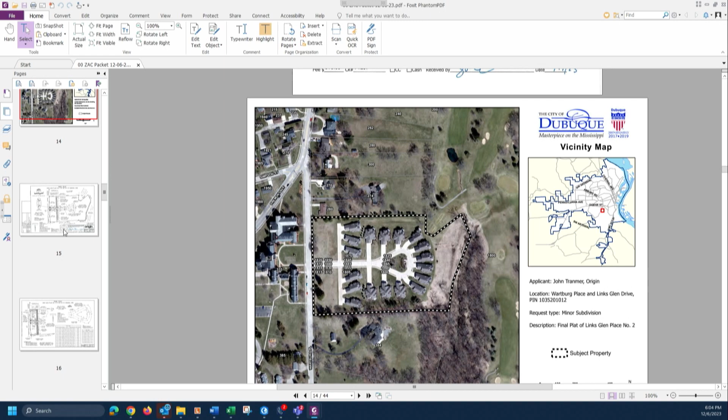Staff report by Assistant Planner Jason Duba. Thank you for the correction to the report - there will be 3 lots again after this plat is completed. Lot 1 is the largest at about 8.2 acres and contains 18 existing residential homes. Lots 2 and 3 are closest to Wartburg Place; Lot 2 is about 0.83 acres, Lot 3 is about 0.91 acres.

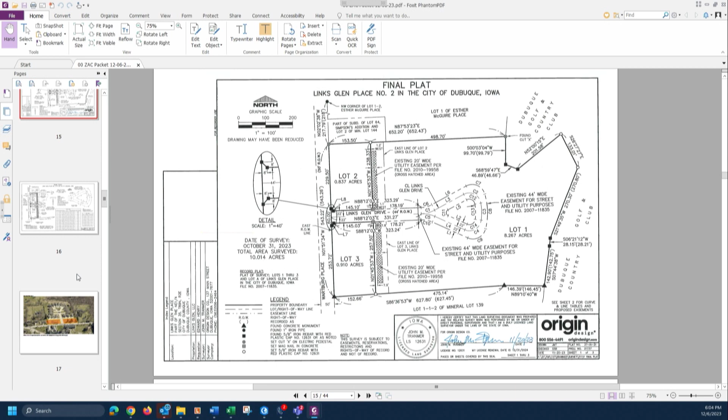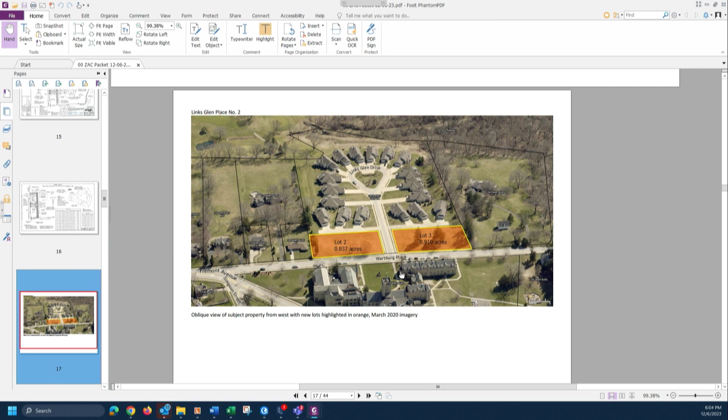These are currently undeveloped, and the plat will allow them to be developed in the future. They're zoned planned residential, and the city's comprehensive plan identifies housing of various types as beneficial to the community. All right, any discussion or questions from the commission? No?

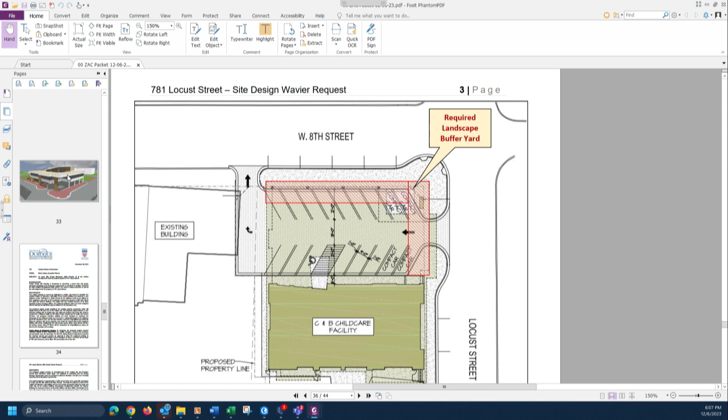This is kind of an odd situation in that, yes, it's a parking lot, but it's also a building. This is a parking lot tucked underneath the building, so the second floor will actually be over the parking lot. Buildings in these districts are allowed a 0-foot setback, I believe, so they can build right up to the property line. But since it's a parking lot under the building, that's where we ran into some issues, and we believed it was worthy of asking for a variance.

If we did have to put the buffers in, we would lose over half of our parking stalls in this lot, which is intended to be for just pick up and drop off use for the daycare only. There's going to be no staff, no parking all day long. It's just going to be a real short, 10-minute kind of pick up, drop off of the kids.

So that's the gist of the parking buffers. The second item is the landscape requirements. Currently, this site has 0 green space on it. The existing site is a parking lot. Starting at the south end, there's a parking lot, there's a building, and then there's a parking lot.

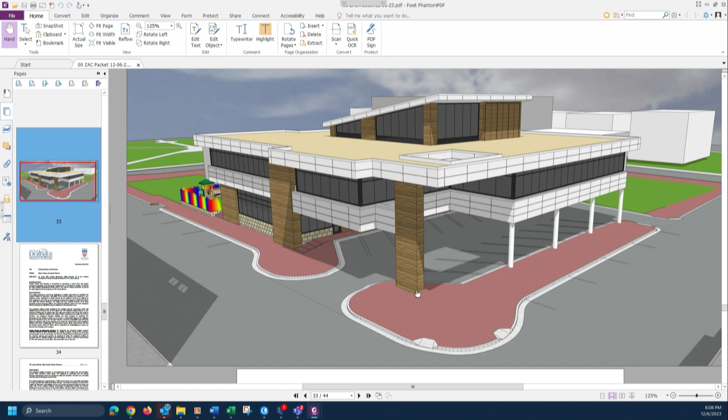As required by state requirements, just to put a daycare in, you do have to create green space, and in doing so we will, but we won't be able to meet the... wait, I'm sorry, that was already approved. The landscaping requirements, I'm sorry, the landscaping requirements usually refer to the green space, and then there's so many trees and so many shrubs required.

The intent is to put in the green space. However, the shrubs and trees would take away from the space that the kids could use in their outside play area. So again, we are hoping to make this better. We will be making it better than it currently exists. It's just that we won't be adding trees and bushes to that end.

So, Benjamin, did you have any?

Yeah, if I could. So my name is Benjamin Beard with Straka Johnson Architects, 355 Digital Drive, Dubuque, Iowa, 52003. Thank you, members of the commission and city staff, for your time tonight. I just wanted to start with a little bit of context.

Sheena, could you go to the broader site image? We felt it was important to point out that this project will be the anchor for a broader redevelopment of the entire block. The Dubuque Museum is in the process of a broader design process right now with their architect. We'll make up the northeast corner of that block, and the new museum property will make up the other 3 quarters. So this will kind of look and feel like a campus. It's not meant to be integral—each of the 4 corners of the block will have kind of a separate feel, but this project does form the anchor of that.

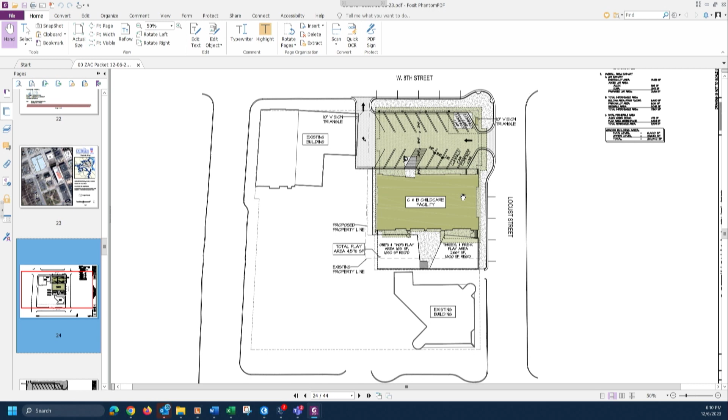We also want to point out the significance of the child care project in general. We're in a huge shortage right now with child care across the city and the region, continuing to trend down. This project's going to provide an awesome lifeline for working families and employees, providing 188 child care slots. The focus will be on Cottingham Butler employees at first, but as child care slots become available, those will be offered to the public. So the building, as Pat pointed out, is comprised of 2 stories.

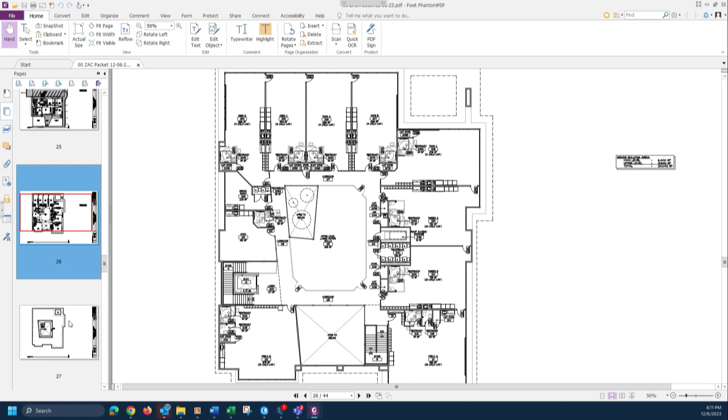It's about 20,000 square feet in total: 3 infant rooms, 3 ones rooms, 3 twos rooms, 2 threes rooms, and 2 pre-K rooms. Those are complemented by a gross motor skills area, a STEM room, and a full food service kitchen. The operator for the site is a Minnesota-based company called New Horizon Academy, and they focus their child care programs on a whole child approach, enhancing that child care experience with age-appropriate STEM-based learning, and also supplementing with a nutritional lifestyle approach through the food service kitchen. That's a repeatable model they've used throughout Minnesota, and it's starting to come into Iowa here.

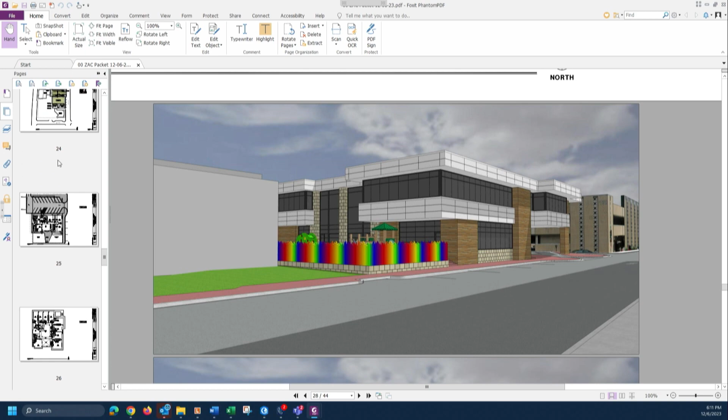So that's kind of the building. Then I wanted to reiterate a thought on the site. If you could pull up our site plan—the site's broken into roughly thirds. The north part of the site is the parking area, of course. We went to great lengths to minimize the impervious surface of the site and maximize the green space, as Pat pointed out. The angled parking is an example of that; it's as restrictive as it can possibly be based on UDC and SUDAS guidelines. The middle third of the site is the building footprint, and the south third is the play area.

That play area is regulated in part by the state. The state says you need a certain number of square feet per kid for about 30% of the children using the playground, so they exclude infants and 1-year-olds from that calculation.

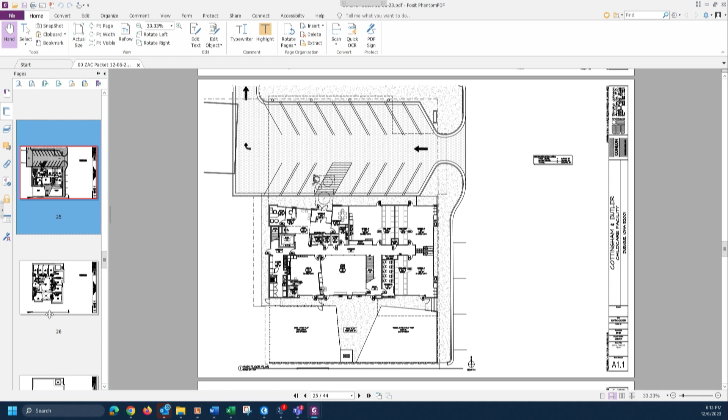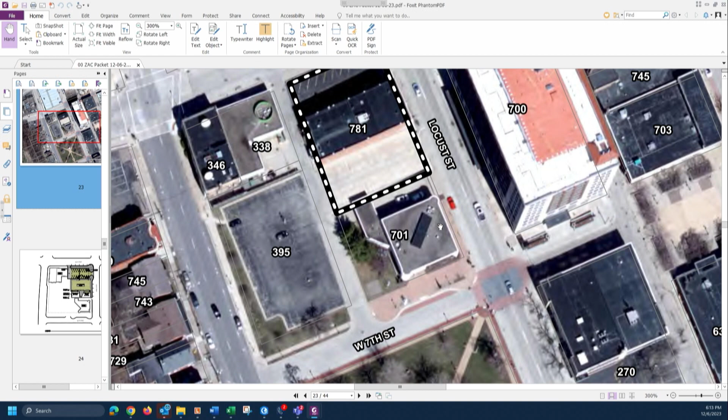Around the playground will be a screening feature that will provide privacy and protection mainly. I wanted to compare that to the existing site, as Pat pointed out, the former KC Hall. If you look at the aerial from a couple weeks ago, you had parking on the north, the KC Hall in the middle, and a larger parking area to the south. As you'd expect in an urban setting, lot lines are nil, parking goes right up to the sidewalks or right-of-way. This is the case for the parking ramp to the north, Roshek to the east, U.S. Bank to the southeast, and, being part of an urban context, there are many other examples of that in the neighborhood.

We wanted to look at what enhancements or improvements we're providing to the site to offset what we're asking for tonight. One of those, as Pat pointed out, is that the parking lot on the north side is transient in nature, so it won't have parking long term. There will be a drop-off period in the morning, a pickup period in the evening, and other than that, staff are required to park in the parking ramp across the street.

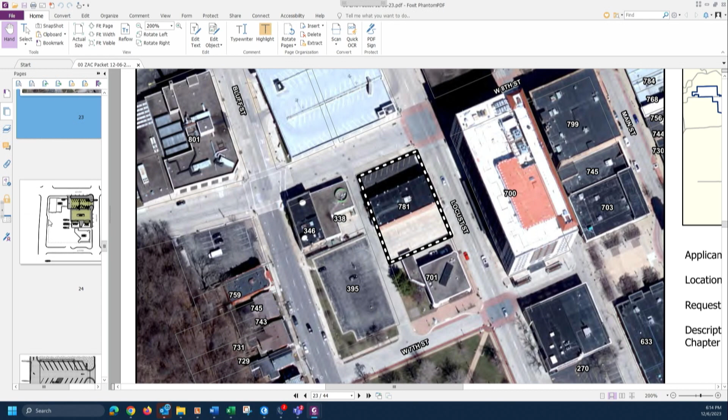Furthermore, the building being cantilevered out over the parking below has a row of columns along 8th Street, and the rendering helps show that. I won't say it replaces a screen, but it helps provide an implied facade of the building there that overhangs the parking area, aligning with the back of the right-of-way. So I felt that was worth pointing out as well.

And then the enhancement of the south part of the site with the play area. We're meeting the regulatory guidelines for the play area, and meeting the improvement from the Zoning Board of Adjustments for the minimum required green space. That's an improvement from what's there today. I know I threw a lot at you there, just underscoring the importance of this moment for the city, and I look forward to your comments.

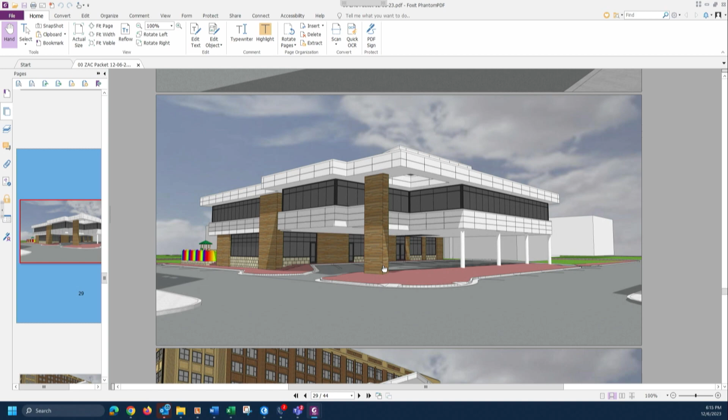Any questions or comments? It looks like a great design. We'll be glad to have it in Dubuque.

Will the play areas be turf or grass? That's to be determined. One of the cool things about New Horizon Academy is that everything they do is based on best practice. Safety, obviously with the play area, is super critical. No matter what we do, we have to be mindful of the play zone or fall zones around the equipment. To answer the question, we're planning on turf, so that would be the first thought. Although engineered wood chips are acceptable too, from that standpoint.

I do have a couple questions. As far as the parking, because it's under the building, is it considered part of the building as far as the building code goes? Well, I don't think so. We are required to sprinkle below the building. That's a good question—from what angle are you thinking? It wouldn't include the square footage of the building. Yeah, I mean, it wouldn't be part of the coverage of the site, for sure.

And that was part of a ZBA request on the 16th. I guess it was another way to justify the distance to the north property line. If it's part of the building, then it's like any other building. Oh, I like your reasoning there.

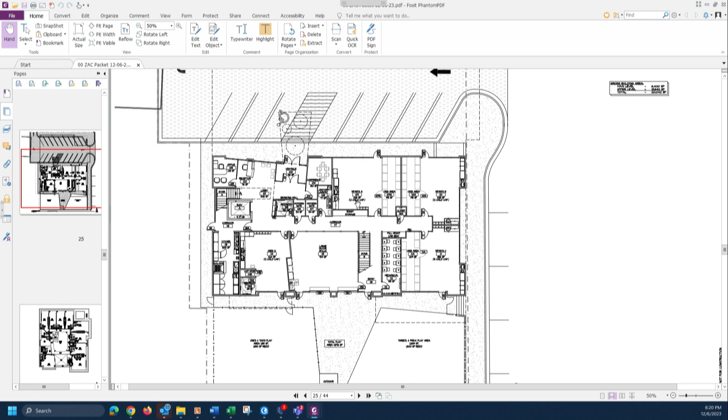Any other questions for the applicant? All right, thank you. Yep, thank you.

Staff report? Yes, thank you, Sheena. Thank you, Vice Chair. So Sheena Moon, Associate Planner. The applicant did a great job of outlining the project overall, so I'm going to dive right into what the code requires and talk a little bit about what they're asking for a waiver from this evening.

Primarily, there are 2 different criteria in the Unified Development Code that the applicant is seeking a waiver from this evening, and they touched on them. I'm going to go a little deeper to highlight the specifics. The first I'll talk about is the minimum landscaping tree and shrub requirement.

When looking at this site and evaluating the number of trees and shrubs required, we took a look at what the applicant is proposing the site to be. There's going to be some reconfiguration of property that will increase the lot size a little bit. So the code would require a minimum of 3 trees and 6 shrubs on the property, and the applicant is seeking a full waiver from those, intending currently not to place trees or shrubs on the property.

That's item 1. Item 2 has to do specifically with these landscape buffer yards, and I want to talk about 2 separate criteria we have with the city. First is the code requirement: the code requires a 10-foot landscape buffer along the side of the parking areas along the street. The applicant had questioned whether they also needed that waiver along the alley, but we did not anticipate that waiver being required there, because that is actually intended to be part of their property in the future. If that were to change, we'd have to readdress it with the commission.

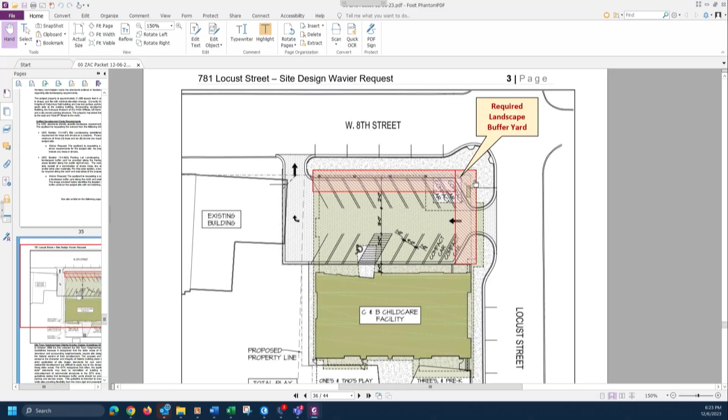These guidelines are designed specifically to conserve the character and intent of historic building stock in the city, and also to take into consideration that in these denser parts of the city, certain design patterns that may be more suburban in nature may not fit the mold in this downtown area. So the design guideline overlay does give some exception to the code requirements specifically for buffer yards. Instead of requiring a 10-foot buffer yard, it just says that when a site is developed, there should be a buffer yard.

So it gives some relief to what that buffer yard would need to be. Instead of saying 10 feet, it just recommends that there be at least a buffer yard. So there's already flexibility in that overlay zone to take into consideration circumstances like the subject property, where a property owner is looking to redevelop a property.

One of the things I wanted to point out is that the applicant, as they mentioned, is electing to put this parking on the property. This is not code-required parking. The zoning district they are in does not require parking to be provided on the property. They are electing to do this in an effort to address the need for drop off and pickup traffic that will be coming to the subject property. That's part of why they're proposing the parking.

The intent of this project is to demolish two buildings that were former classrooms at the old St. Anthony's School. The maintenance on these buildings has gotten to the point where they need new roofs. The boilers for everything are located in there, so they have to be operational all winter long, heating and minimally cooling the space, and it's getting very costly. So their intent is to tear down those 2 buildings and construct a small entryway that would allow reconfigured access to the various floor elevations, as well as this potential parking lot should it happen.

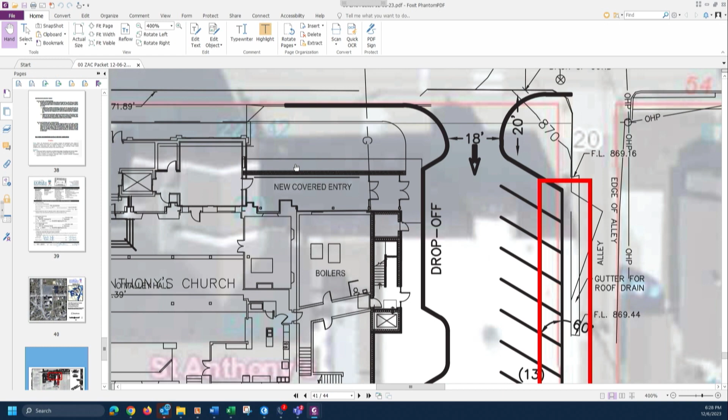After they tear down the buildings, they were hoping to make use of this space with a new parking lot. The whole intent really is to provide a safer spot for as many cars as they can on this side of Rosedale Street. Crossing Rosedale can get a little treacherous in the morning, and there's quite a bit of traffic to and from Senior High School.

In the winter, the street tends to ice up, and there's some issues with ponding. With dark mornings and dark evenings coming earlier and earlier, it's hard to see, so it's just trying to provide a safer place for people to park and gain access to the church for the morning masses.

It will also add some stalls to the site for normal Sunday parking, but really the intent is for smaller events, people can park here, be dropped off, have covered access in and out of the building, and make things nicer for the parishioners.

The width of the existing lot and buildings is such that to put a parking lot in here, it takes the full width of the space available. We use angled parking stalls and an 18-foot drive aisle.

In doing so, we were left with about a 3-foot strip along the existing alleyway. That existing alley is a permeable paver alley. Our intent would be to not impact that at all, leave it as is. There's a concrete band that runs down the alley, that's our line of demarcation, we don't want to do anything beyond that. So we'd have about a 3-foot space left between the parking and that concrete band in the alley, and that's approximate, as we haven't done a full site survey yet.

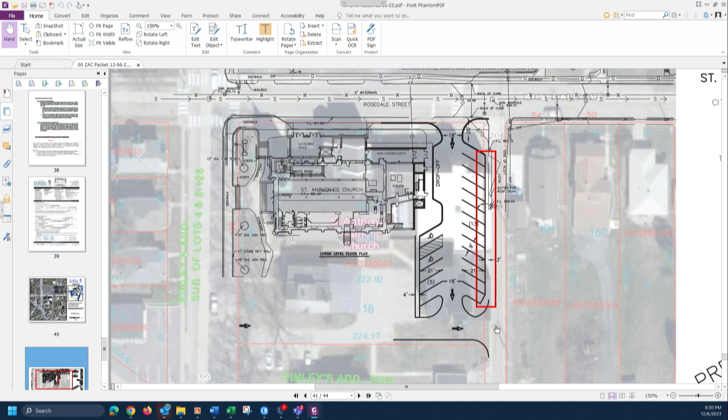If these waivers are not approved, chances are very good the parking will not happen and it'll just become green space. So that's why we're asking for the variance, to fit in a parking lot where we can.

If you have any questions, I'm more than happy to answer. Commission members, do you have any questions?

Is there any room for fencing there? My concern is cars are going to park and there are neighbors along the other side of the alley who haven't had to put up with lights, and it's dark in the morning, cars going to mass, I'm concerned about the neighbors on the other side of the alley.

Correct, right now as best we can tell from aerial photographs and recorded dimensions, there's about a 3-foot buffer. When you pull a car into a parking stall, it's possible the front bumper can overhang the curb about 2 feet, so that leaves about a foot to put in some sort of fence, should we need to.

I'm sorry, why is parking going in here? There's a giant parking lot across the street, I don't understand the whole context. Backing up, last spring the school across the street was sold, and a portion of the parking lot went with it to the new owners of that building.

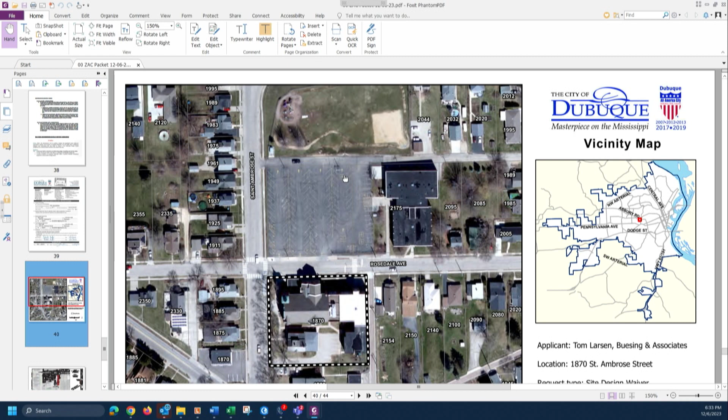This is for the church, where people are meeting Sunday mornings and Wednesday evenings? They're there every morning, daily masses and whatnot, yes. What time? There's cars there when we go by at about 5:45.

Did I answer your question, or do you need more information? Is there no other proposed redevelopment here besides the parking lot? Right.

Does it look like there's only maybe 16 additional parking spots and 2 handicap? That's about what we think we can get. Okay, again, this is all conceptual.

I'm okay with it as long as there's some kind of fence tall enough to block out the headlights going to the neighbors. Since they've never had anything, I don't think it's fair to them to all of a sudden have that.

I just checked with Mr. Kolb here, he's with St. Anthony's Parish, and he said a fence would be acceptable, so if you'd like to require a fence here, they'd be amenable to that, that's not a problem at all.

All right, let's see what's next here. Sheena, would you like to make a staff report, please?

Yes, thank you Chairperson Russell. I will just re-outline what the applicant is requesting.

If you take a look at the aerial image, you can see in white below the sketch drawing where the existing roof line is for the school, and an additional addition at a different point in time where you see that gray roof. Those structures were currently built up to the property line. They're now looking to demolish those two portions and develop this parking lot to better serve their patrons and parish members.

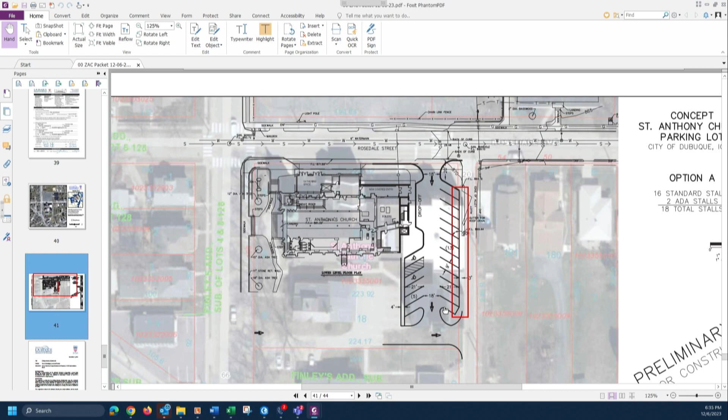So with that, staff have done a preliminary conceptual review of this. This will be subject to site design review if it were to move forward for the applicant. As part of their redevelopment, they are seeking this waiver for the buffer yard.

In this instance, because the side property line abuts an alley, which is a public road or public roadway or public space, they would be required to have a 7-foot buffer yard in this location. They're looking to reduce that to 3 feet.

Other site landscaping would be discussed through the site plan review process, but we did not see a need, based on the existing lush, mature landscaping on the property, for that to be part of this request this evening.

So we're very much focused on this buffer requirement along the alleyway. That's really all I have this evening. If there are any specific questions, I'd be happy to answer them.

Thank you. Any questions for staff? Did we need a vote of 4 last time because we only had 4 people up here, or is that a different situation? We need a vote of 4 for this one as well.

That's correct. All site design waivers require a vote of 4. So I understand the concerns about the redevelopment and what is occurring on the property.

We don't always have the ability to regulate and ask an applicant to do a specific type of development on a property. So we would ask the commission to look at this from the standpoint of what they are requesting a waiver from. They're not requesting approval for a parking lot necessarily - that's a permitted use along with the church facility - but they are requesting that waiver for the landscape buffer yard.